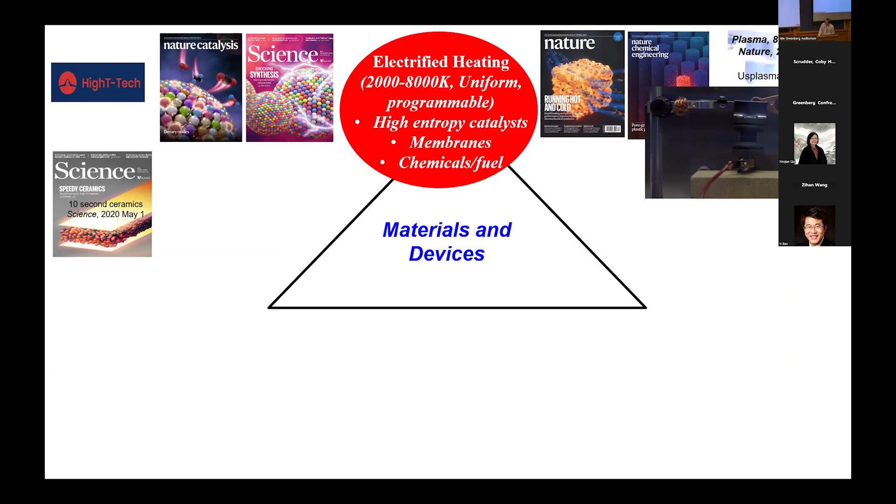So about 2 years ago, my group actually studied the process. So that is a plasma. So that actually allows us to go to 8,000 K.

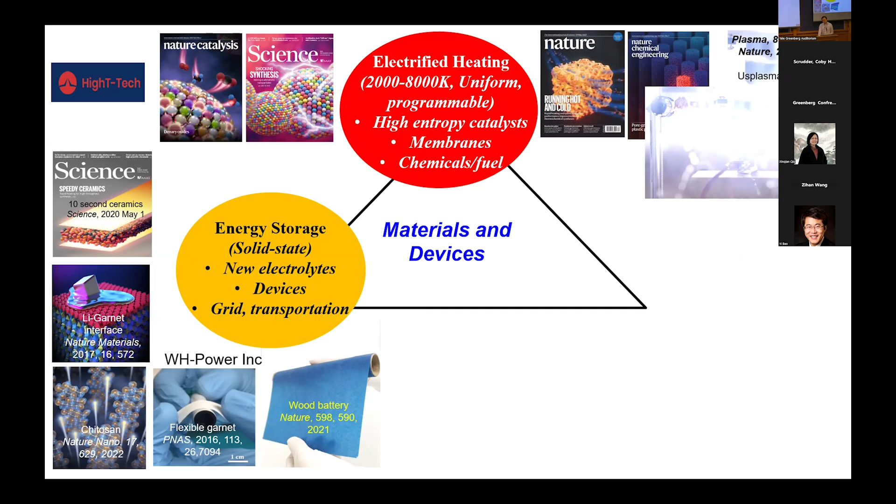In this case, you are playing with electrons and ions; the coupling is what allows you to make the so-called electrochemical devices, right? And my interest is really about how to turn materials into a super ion conductor. Because when you move electrons, the ion is the problem. It's the slow charge species in your device. So, for example, I work on nanocellulose, how to convert nanocellulose into a highway for ion transport.

So now, I'm going to talk about the wood, and this is something that I didn't anticipate until I was funded by the Air Force and started to work on lightweight materials and then tried to figure out how to align the fibers into structural materials. And eventually we came to this point of using wood with fibers that are all aligned. So I'm going to give you a kind of overview of my research.

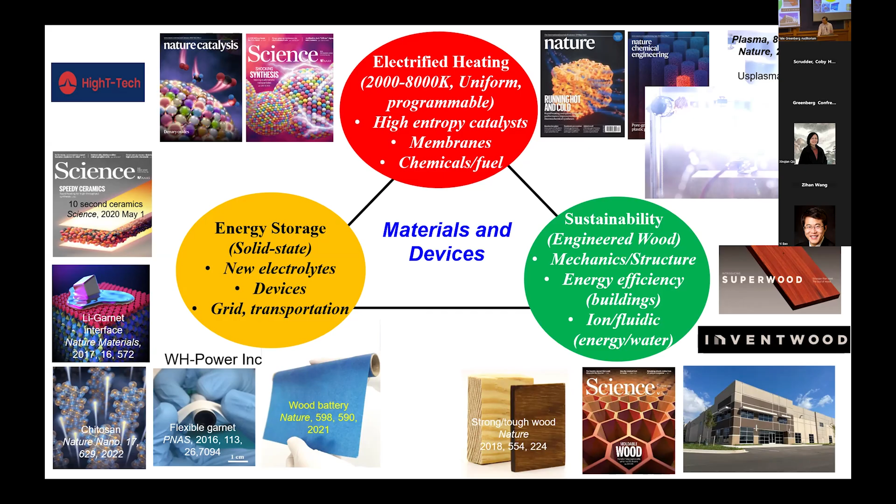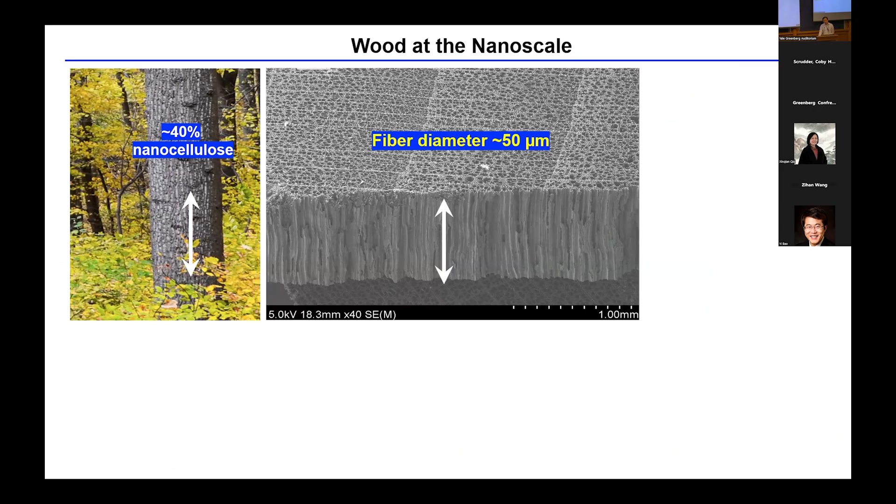Most of you are very familiar with wood, but I think for some of you, you may not be familiar. So this is an introduction slide I made for myself when I got into the field. Wood is an anisotropic material with a lot of complications here, but in the end, to material people like myself, I'm only interested in these nanofibers, and we even try to remove the lignin because it is in the way. That's kind of the initial idea. But now people also think about how to utilize the lignin as the glue, and, as Sheldon talked about, how to treat the wood in different ways.

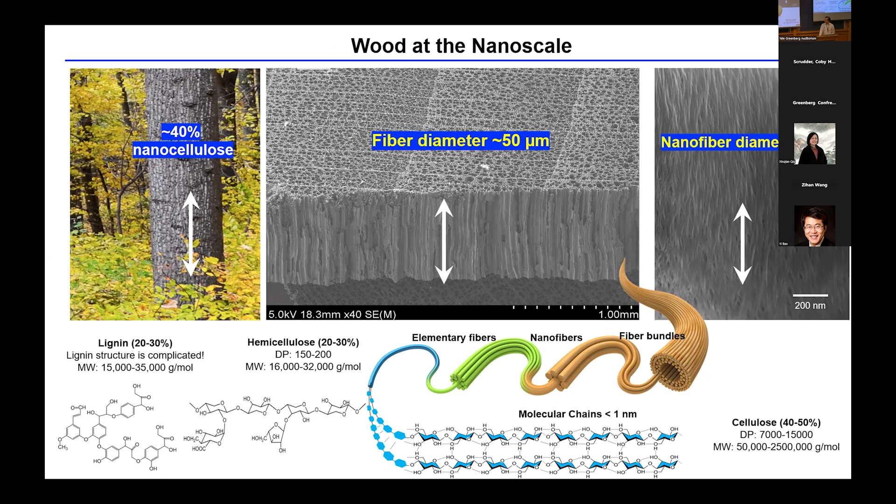And so this material is called nanofibers. The diameter is very similar to carbon nanotubes. And you don't have to synthesize this material. Nature already produced this material for you, but you do need to process it, right? And so typically there are two ways of using the fibers. You either completely separate them apart, and then you build up from the bottom up, right?

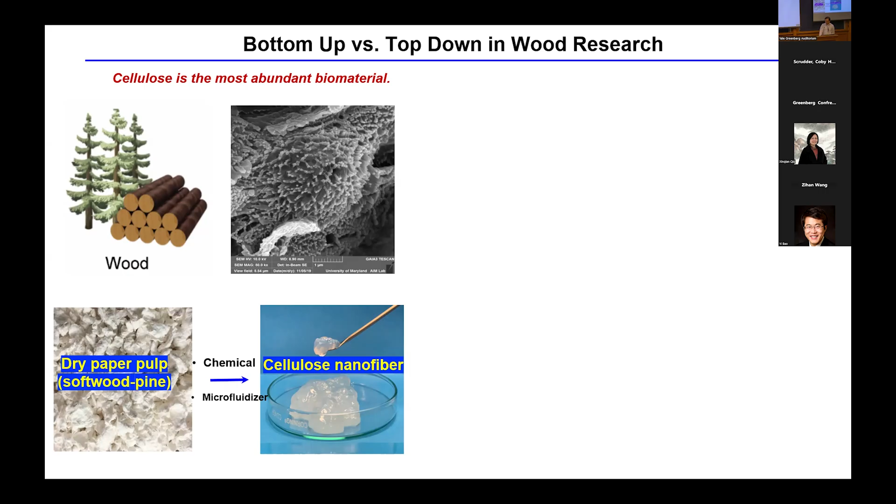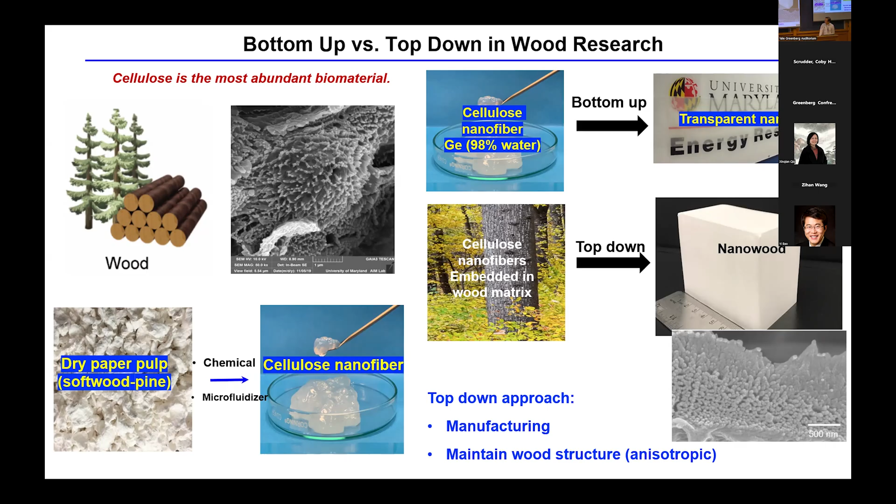So I think the potential advantage is using wood as a structural material, but using the nanoscale fibers as the performance enhancer; you focus on the nanofiber. In that way, you may be able to address some of the manufacturing challenges.

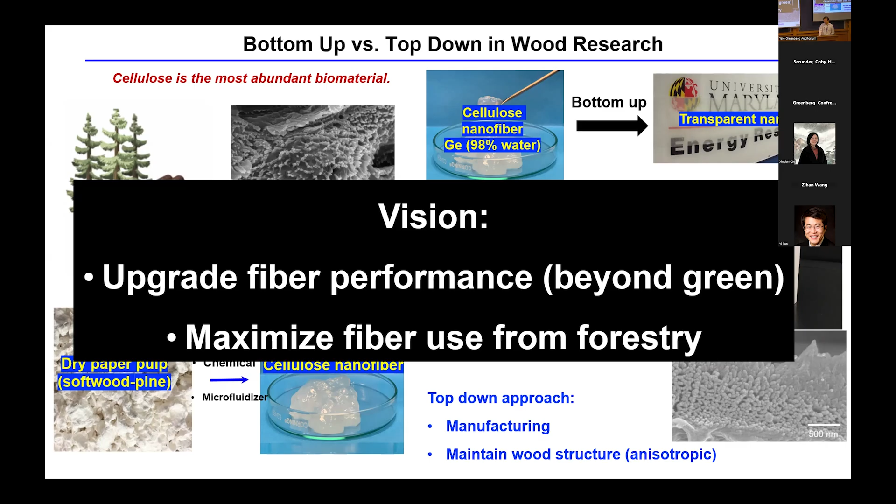So, I mean, the goal, if you talk to USDA people, talk to JY, they always say, okay, first people want to use as many fibers as possible. So maximize the fiber use, right? And that is because this is a green material. But I think also we have to upgrade the fiber performance. If it's just green, I think it's hard to sell as a product, right? So my group has actually been working on many different technologies over the years.

So I think people talk about transparent wood. Orlando talked about transparent wood already. And back in 2016, Lars Berglund's group and my group actually published this paper on transparent wood, and that has much better performance than the previous publication. So we really learn a lot and build on existing literature, and try to look at this whole thing again, see what we can do.

For example, the densified wood. I mean, there are many products even on densified wood. But now if you look at this again, can we go even better? Can we get a tensile strength up to 2 gigapascals, for example? Now we can get to 1.2 gigapascals, 1.3 gigapascals. At that time, we could get to 600 megapascals. But what is the ultimate performance, right? What is the ultimate limit? So I think that is the kind of question we ask.

And so I'm going to talk about cooling wood and foldable wood. And since Sheldon was talking about self-flow, and Orlando also mentioned a little bit about black wood. And back in 2016, 17, we worked a lot on wood as a water treatment device. What that means is that you take the entire wood, you carbonize the surface. Actually, Tian Li, now a tenured professor at Purdue University, her first project was all about, one is the transparent wood, the other was using wood as a water treatment device. And I was never able to get any funding for water research. So I completely killed the direction in my group.

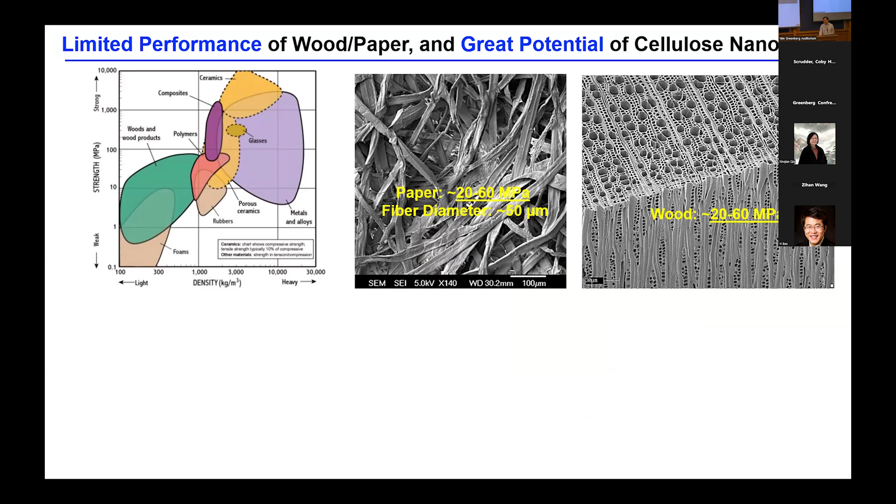So I was funded by an Air Force lightweight project. My first funding as a faculty at University of Maryland at the time. And the idea is how to come up with a lightweight structural material. And if you look at the cellulose nanofibers in wood and paper, they have these amazing properties. For example, the tensile strength for the best part of the fiber is up to 7 gigapascals.

And they are held together through hydrogen bonding, right? So they are very different from plastics. The hydrogen bond is very weak. It's a secondary bond, right? So you can break an individual bond very easily. But if you have a lot of them, and you have a three-dimensional network, if you add them all together, you can get very high mechanical properties, at least in one direction, right?

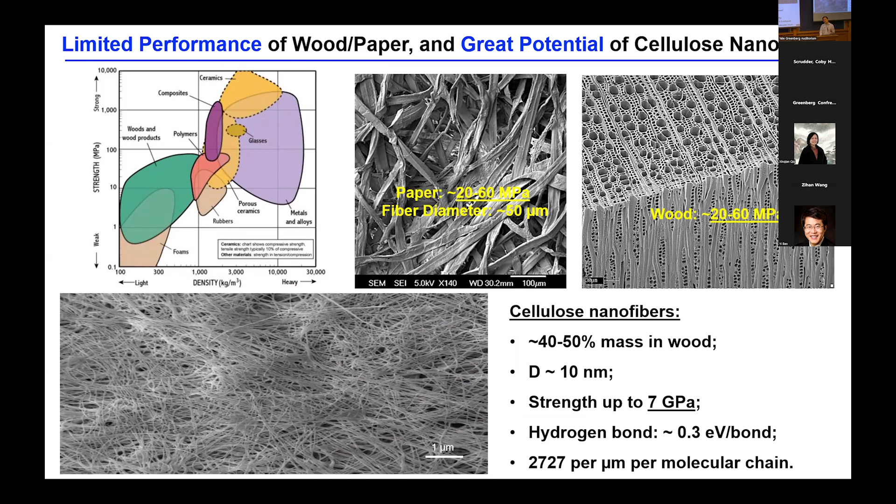But if you look at wood and paper, the mechanical strength is about 20 to 60 megapascal. It's good enough for many applications, but it definitely cannot compete with carbon fiber, cannot compete with metals like steel. So this is actually my first grant. I was so excited at that time. I didn't know why I got this grant.

I was focused on ion intercalation using a battery approach to get optoelectronic devices, but I couldn't get funding. A lot of physicists are actually working in that direction. But somehow when I wrote the proposal about lightweight transparent paper, I got funded. And I think that is the beginning of the whole thing. Dr. Zhihong Li, who got training from KTH, joined my group at that time.

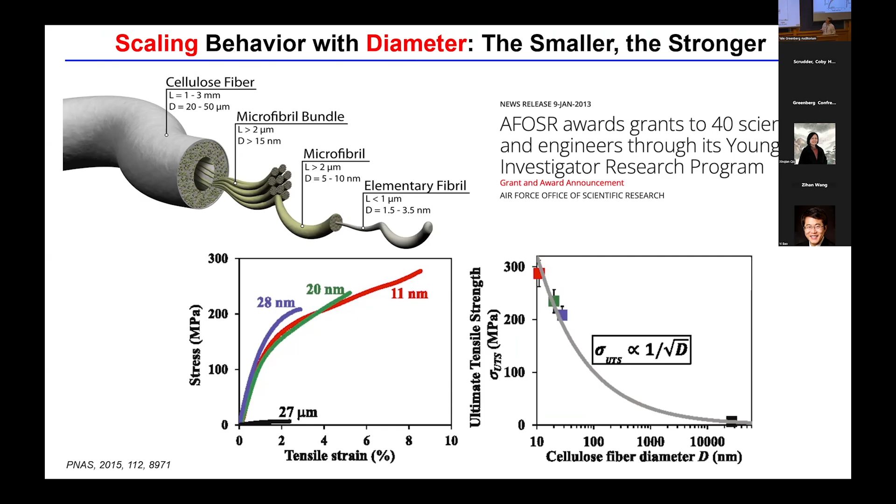So this basically shows you, if you make a piece of paper using smaller fibers, mechanical strength will actually be enhanced, right? You get so-called smaller, stronger. But you don't lose the ductility. That is very different from metals. Usually you increase one, you decrease the other. But here you're not losing the ductility, so the toughness got increased as well. So this is very interesting.

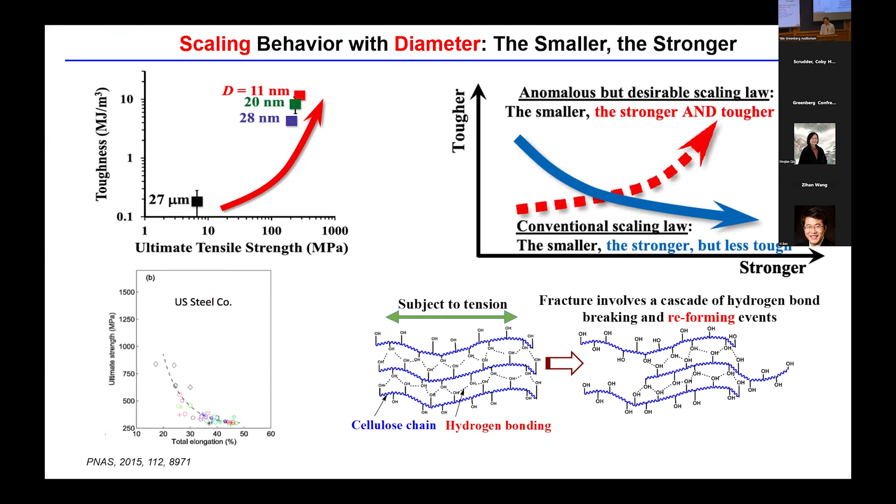I know there's some debate about whether hydrogen bonding is the main factor, but at least in terms of the toughness and strength relationship, you don't sacrifice one or the other. Of course, at that time we were talking about tensile strength of like 200 or 300 megapascal. But in the proposal, I said something like 1 gigapascal. Then we have to align the fibers, right? So how do we align them? Why did I propose 1 gigapascal? Because that's the number that can get funded. So we propose a number and then we push the students to come up with ideas.

So in this case, we have this random fiber network and we have to align them. If you work on carbon nanotubes, you have to work with alignment to maximize the fiber-fiber interaction. You maximize the contact, so the secondary bonds. So we take these long bacterial fibers, we soak them, we stretch them, and we can get to 1 gigapascal, right? So good, we proved to the Air Force we can make 1 gigapascal. Then the question is, how do we make a lot to make a structure for the Air Force?

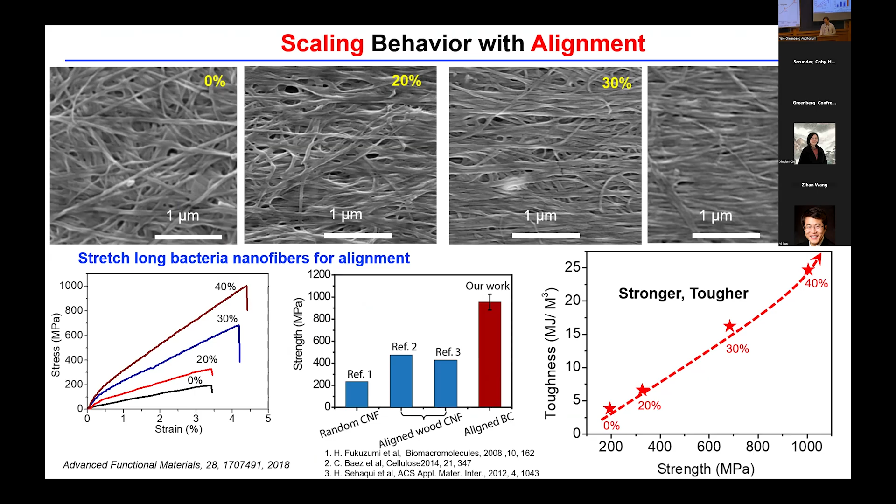At that time, to be honest, we were actually working on transparent wood. But I noticed a sample that had a very, very weird shape, but it was very strong. So all of a sudden I felt like maybe this is the way to get the strength and get the scale. Obviously, the sample size is pretty big.

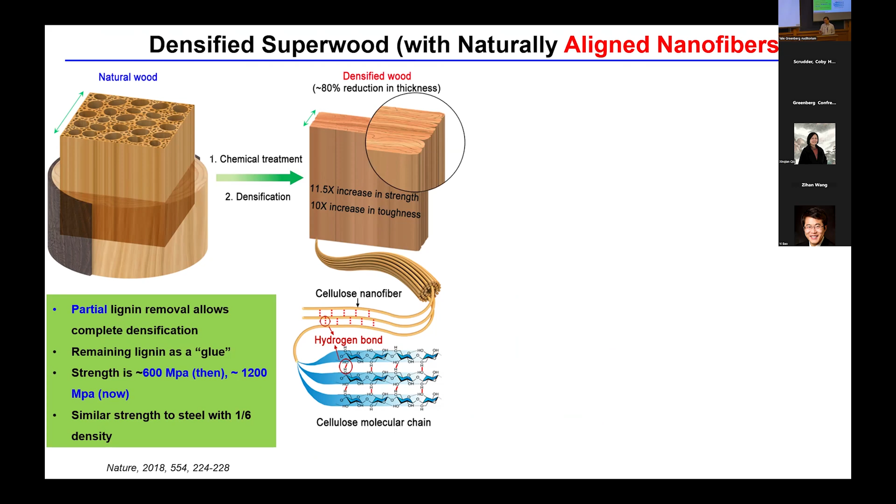So now if you look back, the wood is made of fibers, and your task is really to get the fibers together as much as you can, all the fibers inside the entire structure, right? So if you treat it, you soften the wood, and you can densify it. You don't destroy the alignment. And at that time, we got to 600 megapascal in a Nature paper. And we definitely can repeat the data. Many groups have actually repeated the data already.

Yesterday there was a paper talking about how many Nature papers' data can be reproduced. So we definitely have reproduced this data a lot, and we can further improve the performance all the way to 1.2 gigapascal. And a lot of details go with that.

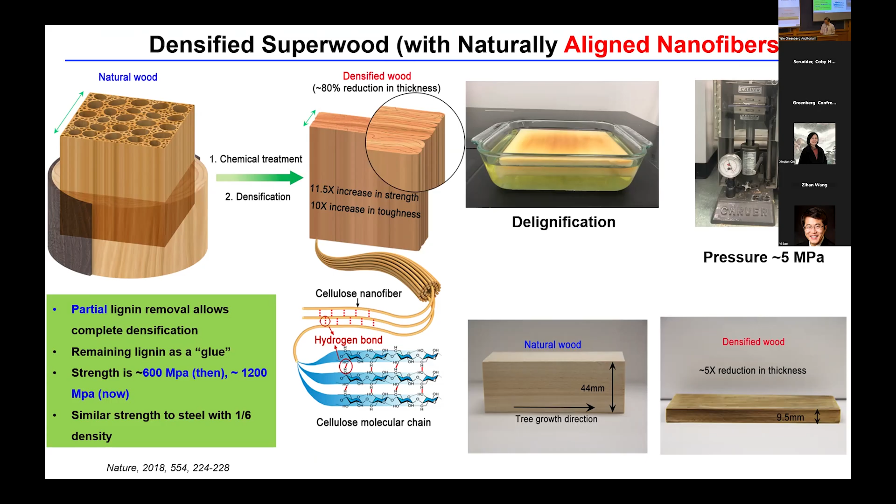And I had ARPA-E funding right after this project, and I really appreciate ARPA-E, because ARPA-E funds disruptive ideas. Otherwise, I don't know where I'd get a total of almost $25 million from one agency for one material. I'm very fortunate for that. We're grateful for ARPA-E funding.

So these are some of the data, and I've talked about them at different conferences as well. One of the highlights is that as we increase the tensile strength, we don't lose the ductility. And we always say this material is as strong as steel, at least in one direction, but it's 6 times lighter. So if you normalize by the density, you actually have a much better so-called specific mechanical strength.

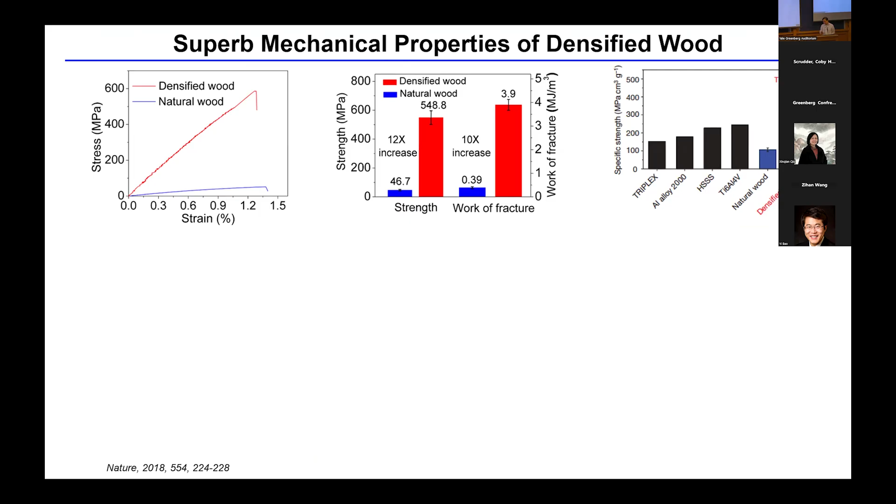And if you look at the structures, all the way you have these fibers, of course, not surprising. One of the keys is not to destroy those fibers. So that's why JY mentioned today, you should not use acid to treat the wood, because it will decrease the DP, degree of polymerization. So the longer the fiber, the better. So definitely don't destroy them.

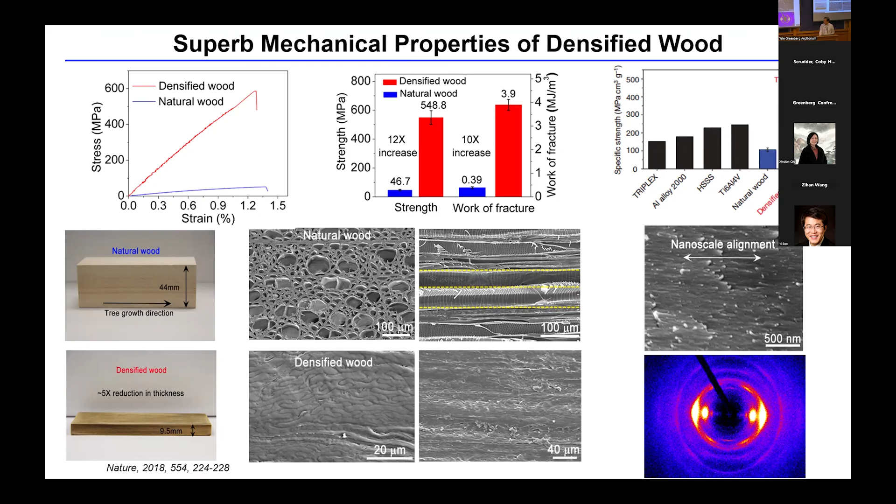Try to get them in close contact so that you can maximize the performance of the fibers themselves, which is all the way up to 7 gigapascal. Our density right now is about 1.3 or 1.35, but the density of the fibers itself is up to 1.5, right? So you see there's a big gap there. That's why I predict, I was trying to work on this, that eventually we should be able to get to 2 gigapascal for a piece of bulk wood.

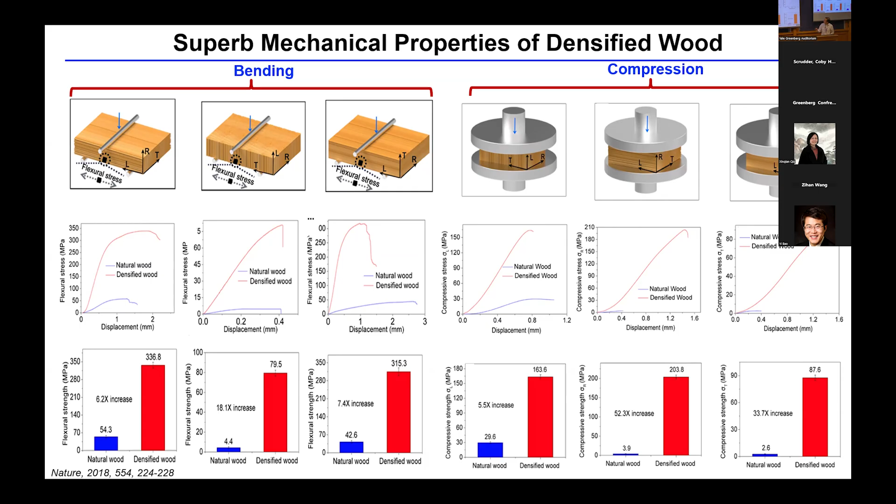So these are the property testing in different directions, and they are related to different applications, bending test, compression in all 3 directions. And so they are more than the increase of the density, right? So the density of this wood is increased by 3 to 4 times. So if we don't get anything from the hydrogen bonding, we should get a 4x performance increase, but we're getting more than 4 for many directions. So we are increasing the interactions between the fibers. It's more than a simple geometrical effect.

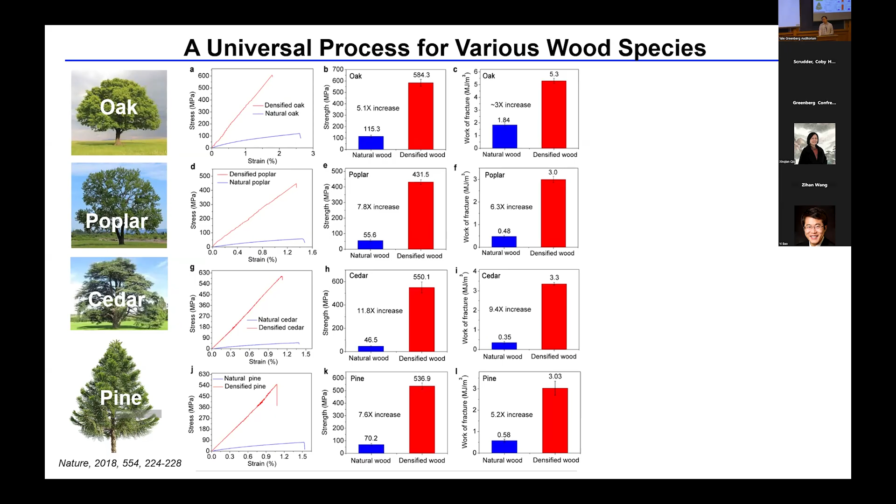ARPA-E funding, we have CEO Alex Lau here from InventWood and Jiaqi here. So at that time they came in, especially Alex came in, and we needed a cost share for the ARPA-E grant application. We also needed a viable team to convince DOE we can do the job. So Alex put a lot of effort to put the team together. We convinced DOE, and we're so fortunate to get this big grant. Now with DOE funding, we are actually having a plant in Maryland. And so if you guys have a question, Alex is here. Talk to him. I think he has a lot to share as well.

Material performance is one thing, shape is another thing, right? That's the difference between a desk and a chair. They are made of wood, but they have different functions because they have different shapes. So you can engineer shapes at the materials level. I always say that the difference between wood and plastic or metal in the way to shape it is that for wood, you use water. For plastic and metal, you use temperature. So when the temperature is above the glass transition temperature, you can mold plastics, at least thermoplastics.

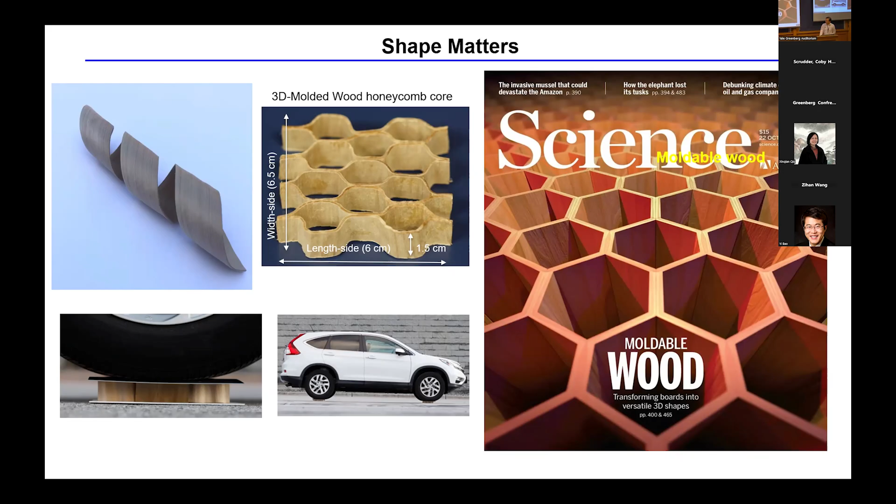But the same thing for wood. With the right combination of the lignin and the water content, you can mold it any way you want. And then, of course, you can fix it when you remove the water. And if you want to lock it forever, you can do a further treatment, incorporating some polymers. So I think there are a lot of applications. Since we published the paper back in 2018, I'm still receiving emails until today about using this for all kinds of even weird applications, like a music instrument, a baseball bat, a ping pong paddle. The best ping pong paddle company contacted me, the baseball teams.

And of course, InventWood is taking the lead. They are much better. They have a professional team. And now with the material, they can really look into real applications and collaborate with the real industry. So when people come talk to me now, I always guide them to talk to Alex and Jiaqi. But you can also use your imagination. If we can really manufacture this material, if we can really get the tensile strength way beyond regular wood, 600 megapascal to 1 gigapascal, then you can really enable a lot of applications.

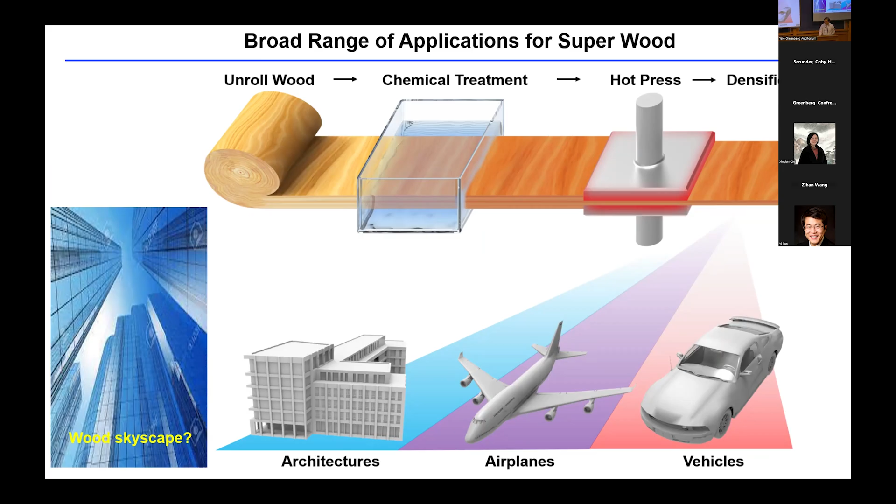So the other thing is really about the thermal and optical. I will go very quickly. It's really about the cooling wood. So if you think about the building, I think Orlando already talked about that.

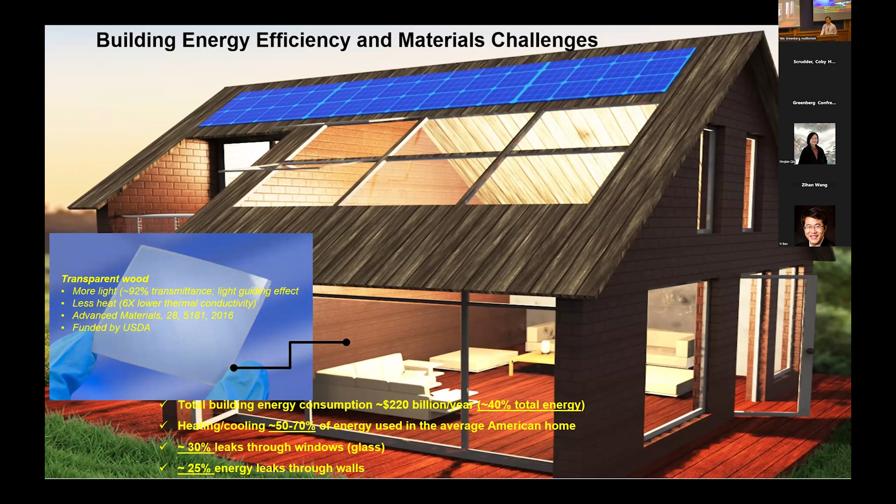Building. This conference is about the buildings. So right, you can think about transparent wood. I have a project with Anna Dyson, a professor at the School of Architecture here. And the idea is how to use transparent wood and integrate them into building settings. More than just replacing glass. How about energy saving? How about some thermal comfort levels?

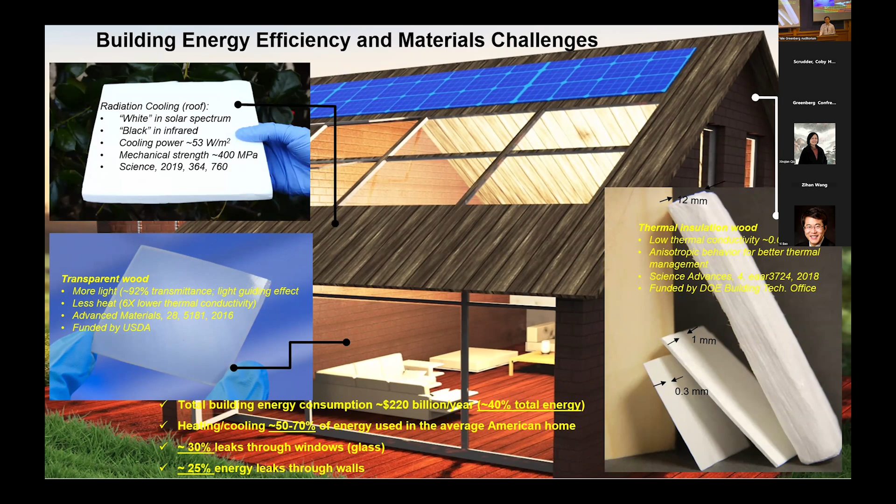Yeah, right. Making insulation foams, and this is something called a self-cooling wood that is white, very white, the whitest wood. I think Orlando talked about the blackest wood. In this case, it's the whitest wood, but it's also very black in the infrared range. So that can emit the heat in that range. We cannot see it, but it's completely black in the infrared. So let me quickly go over these slides.

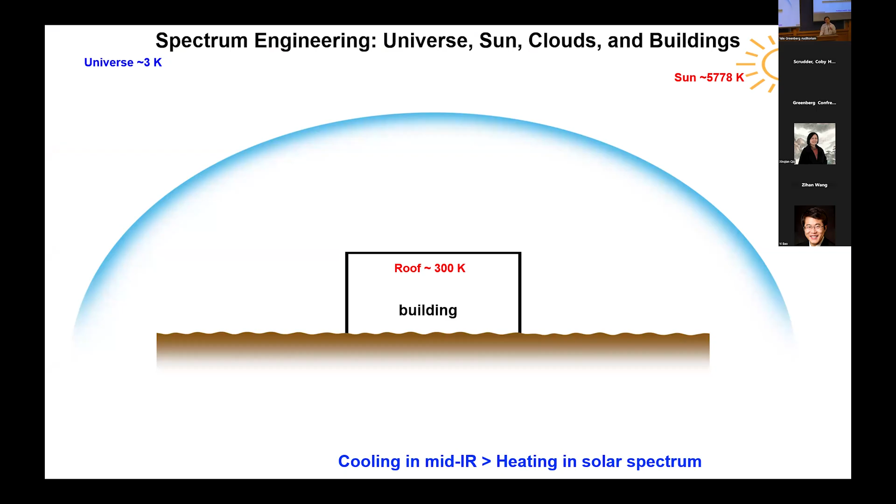The idea of the radiation cooling is that the universe is very cold, but your house in the summer is very hot because you have this mismatch. You have the sunshine on your roof. If you don't have the super white roof, you're going to cook your house. But the roof temperature, let's say room temperature, is like 300 Kelvin, and the wavelength is about 10 microns, right?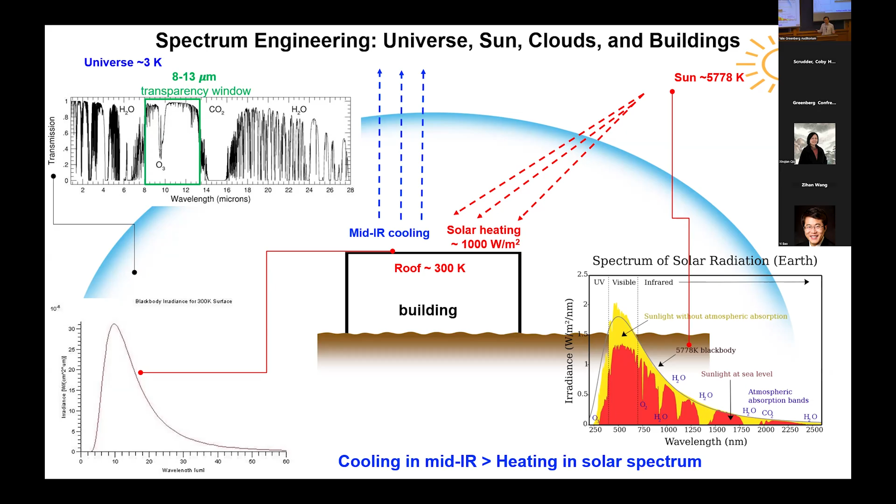So in that wavelength range, the atmosphere is actually transparent. So that means you can dump the heat through the cloud all the way to the universe. So this is the real net negative energy output into the universe. You can really cool the Earth. It's not a traditional air conditioning, where you dump heat from inside the house outside, so overall you don't dump any heat from the entire Earth system point of view.

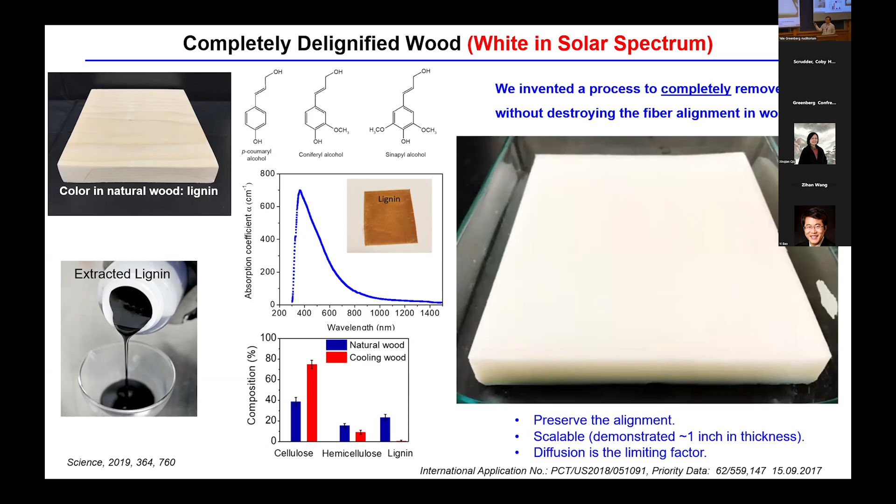So this is the idea: making cooling wood that is as white as possible for taking care of the visible range. I still remember I shared this photo with JY a long time ago. We cooked the wood, and the wood is still a piece of wood. He was very surprised. So this is very interesting. It's very white, but in the infrared range, it's very black.

Why is that? Because they have a lot of vibrations at the molecular scale, so they absorb energy. That is very high absorption, which is also high emissivity. That is why this material is very, very black. So if you integrate the visible whiteness that reflects the energy out, and the body temperature blackness that emits the energy out, as a result you get a net negative, something called self-cooling.

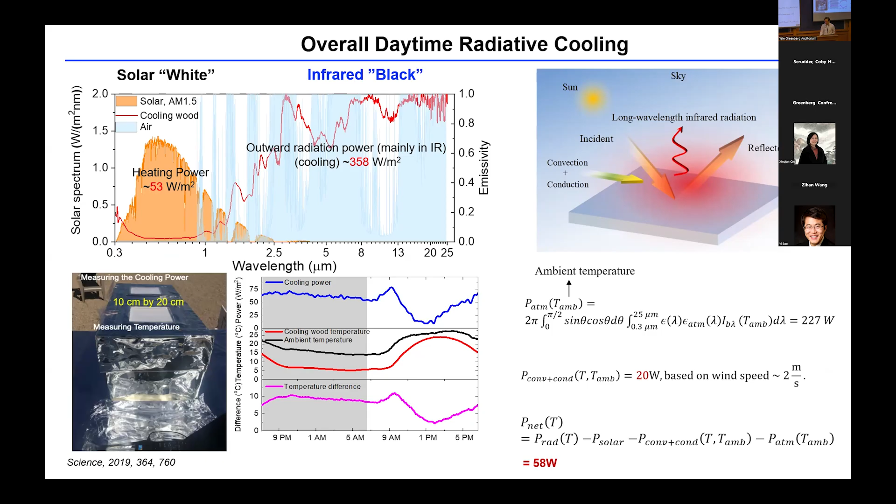This is a concept that many people use now for making cooling paint, first demonstrated by Stanford Professor Shanhui Fan. He had an ARPA project on that topic as well. So this material is also very strong. I think Orlando already mentioned that. And it's a structural material.

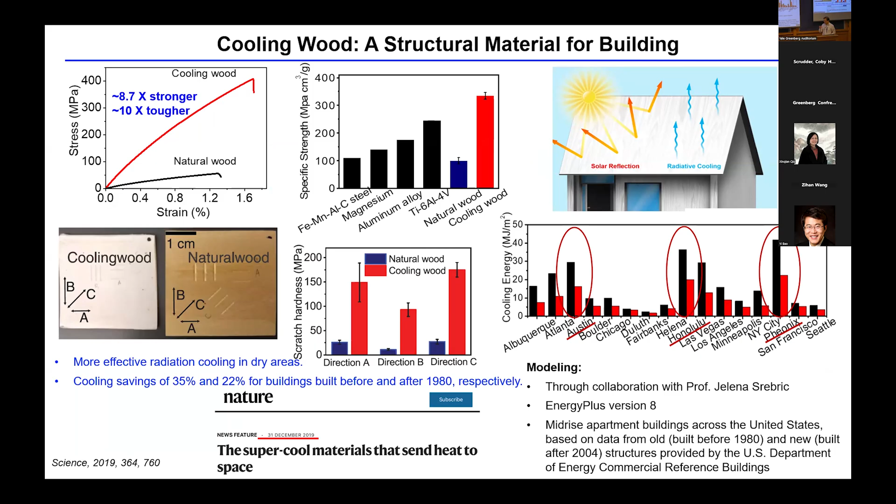So I just gave you these two examples. I think there are a lot of possibilities for the community to think about, and also to work with School of Architecture people, architects, and also forest management people, in this vertical integration concept, to make an impact using engineered wood from the nanoscale.